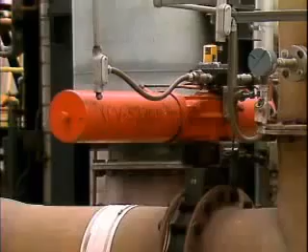Some valves require relatively long stem travel or a large amount of force to be positioned. In these situations, a piston actuator is probably more suitable than other types of actuators. This is one type of piston actuator.

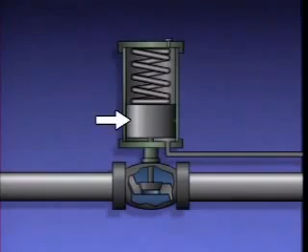It's called a single-acting piston actuator because a controller or similar device controls the air pressure on one side of a piston. When air is fed through this air supply port, the piston moves along in a cylinder, compressing a spring and opening the valve. Air on the other side of the piston leaves the cylinder through an air vent.

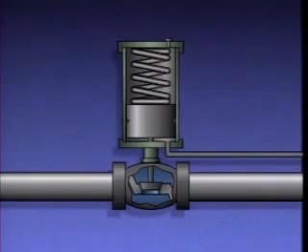When air pressure is reduced, the spring expands, moving the piston in the opposite direction, closing the valve. If air pressure drops below a predetermined value or is lost completely, the spring will force the piston down to close the valve. In other words, the valve will fail closed. Since air pressure is only fed to one side of the piston, this type of actuator is called single-acting.

However, there are piston actuators that have air pressure supplied to both sides of the piston. This type of actuator is called double-acting. The parts of a double-acting piston actuator are similar to those of the single-acting actuator. However, this one doesn't have a spring. And there's an air supply port on each end of the cylinder.

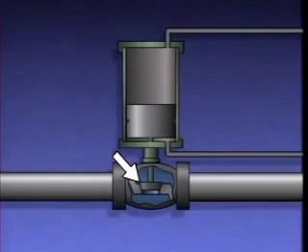When air pressure is fed into this supply port, it pushes against one side of the piston, which moves the piston to open the valve. Air on the other side of the piston is bled off through the other air supply port. When air is fed in through the supply port in the opposite end, the piston is pushed in the other direction, closing the valve. Air is bled off through the other supply port.

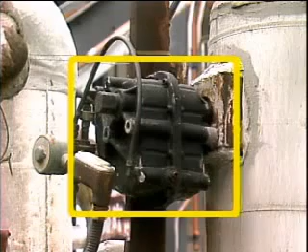A vane actuator uses air pressure acting against a paddle or vane to position a valve. In general, a vane actuator is simple in design and relatively small for the amount of force it can supply to open or close a valve. Vane actuators are used primarily with rotary-type valves, such as ball, plug, and butterfly valves, because the vane rotates the valve disc. Here's a cutaway of a vane actuator that operates a butterfly valve.

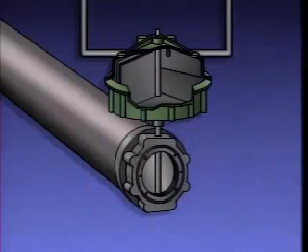When air pressure is supplied through this air supply port of the vane actuator, it pushes against a vane, causing the vane to swing across a housing. This turns a shaft. As the shaft turns, it opens the valve.

Air on the other side of the vane is bled off through another air supply port. When air pressure is supplied to the opposite supply port, the vane is moved in the opposite direction, closing the valve. Air on the other side of the vane leaves through the other supply port.

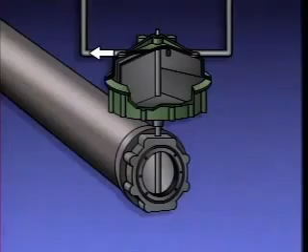Pneumatic actuators are commonly operated by air signals that come from a controller. In some cases, the controller signal alone isn't enough to overcome forces on the actuator, such as friction in the actuator or the valve stem, or fluid pressure acting against the valve disc. To overcome these forces, some actuators must be provided with a different supply of air that's capable of applying higher pressures than the air signals from the controller.

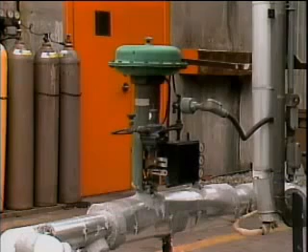This is accomplished by using a positioner along with the actuator. Basically, a positioner is a device that uses a separate supply of air to ensure that an actuator correctly positions a valve in response to a change in the air signal from a controller. In other words, a positioner's job is to place the control valve in the position called for by the controller. The positioner shown here has 3 gauges.

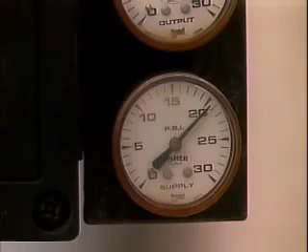One gauge indicates the supply air pressure to the positioner, and another indicates the output air pressure to the actuator. The third gauge indicates the input signal pressure from the controller.

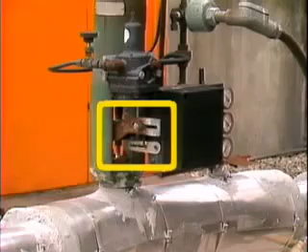A mechanical linkage joins the actuator stem to the positioner. This mechanical linkage may also be called a feedback linkage. As the actuator stem moves up or down, it also moves the linkage. The position of the linkage indicates to the positioner when enough movement has occurred to correspond with the air signal from the controller.

When a positioner is used with an actuator, the signal from the controller goes to the positioner instead of directly to the actuator. The positioner controls a source of air that enters here and is sent to the actuator through this line.

When the controller sends a signal to close the valve, the positioner receives the signal and converts it to the appropriate air pressure using this air supply. This pressure is then applied to the actuator to close the valve.

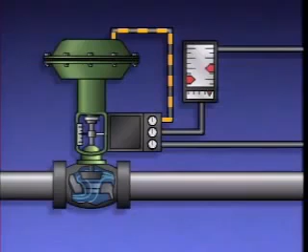The feedback linkage indicates to the positioner how far the valve is from the desired position, in this case, fully closed. As the valve moves toward the fully closed position, the feedback linkage causes the positioner to change the air signal to the actuator, so that as the valve reaches the fully closed position, actuator movement is stopped. On a piping system diagram, a positioner may be represented by this symbol.

Actuators, like other process components, are susceptible to mechanical problems. Since an actuator problem can adversely affect the operation of a process, it's important to know how to identify actuator problems when they occur. The following discussion is not intended to enable you to isolate the exact cause of an actuator or control valve failure, but it can be used to help you narrow down the scope of a problem to minimize the effect it has on a process.

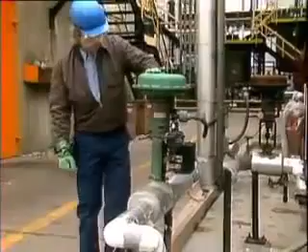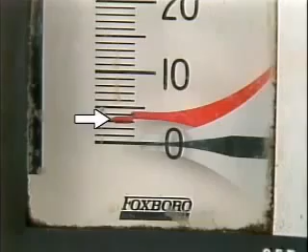Often, an operator can detect an actuator problem by looking at its valve position indicator and comparing it to the position called for by the controller. For example, if the position indicator is showing that the valve is closed, but the flow indicator on the controller is showing that the flow is still continuing through the valve, then the valve seat and disc are probably worn, allowing leakage through the valve.

However, if the position indicator shows that the valve is open when it should be closed, the problem could be in some other part of the control valve or in the actuator.

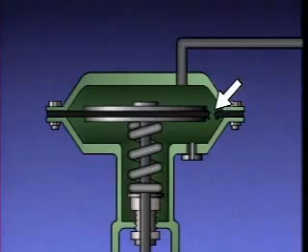For example, a diaphragm actuator will not be able to properly position its control valve if its diaphragm ruptures or if air pressure to the actuator is lost. Loss of air pressure could result from leaks in the actuator around the diaphragm edge, from leaks in the air lines to the actuator, or from a crimp that blocks the flow of air in an airline going to the actuator.

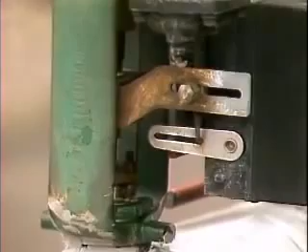If a positioner is used on an actuator, its gauges should be checked to make sure they have the appropriate air pressure readings. Sometimes problems with a positioner can also result from a loose or broken feedback linkage, so it should be checked too.

Regardless of the reason for the failure of an actuator or a control valve, there are some basic steps that can be taken to minimize the effect that the failure has on the process.

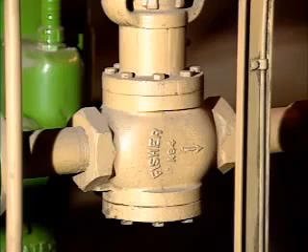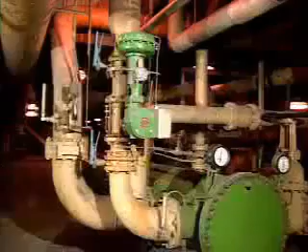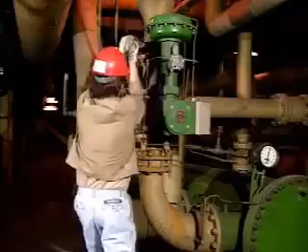Some actuators have manual operators on them that may be used to regain control of the process flow in the event of an actuator failure, while other actuators and control valves may have manual bypass lines around the failed components. Bypass lines can usually be placed in service by isolating the failed actuator's control valve and positioning the bypass valve to restore flow.

When either a manual operator on an actuator or a bypass line around an actuator is used, it will probably be necessary to maintain communications with the control room to ensure that the proper flow rates are maintained in the process. Since there are so many different possible configurations that actuators and control valves can be arranged in, you should check your company's procedures before operating any actuator manually or on the bypass.